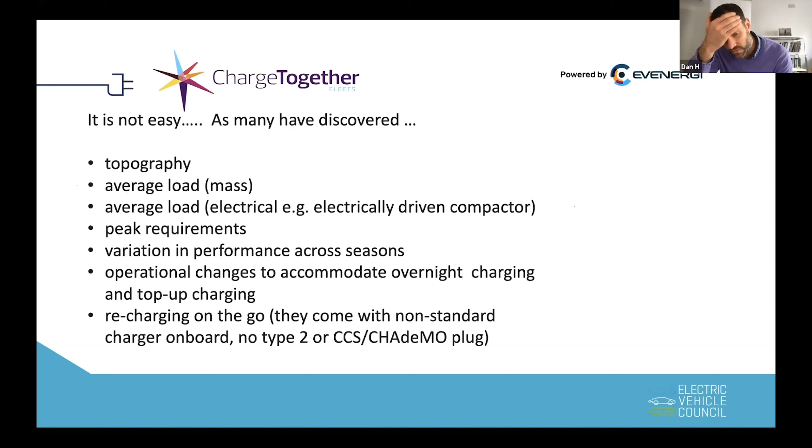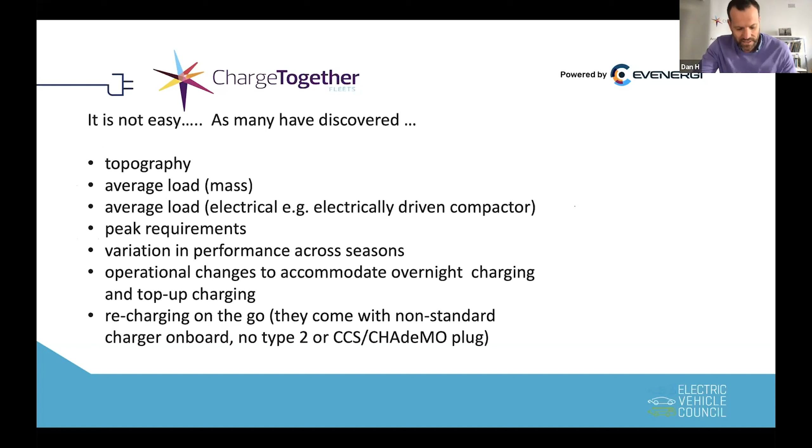It's not easy. There's lots of things to think about: topography, load, peak requirements, and operational changes with overnight charging and having to recharge on the go. There's still things that need to be solved. It's quite complex, but it's really pretty close, and in many cases it's actually there. And certainly it's very, very close in the long term.

So what it will require, and I guess this is the ChargeTogether plug, is a lot of collaboration. So the focus for people on the line who are transport leaders or suppliers is working together to drive forward procurement, to give people like SEA Electric a lot of forward visibility, and obviously the role of the EVC, which is really focused on government policy support and grants.

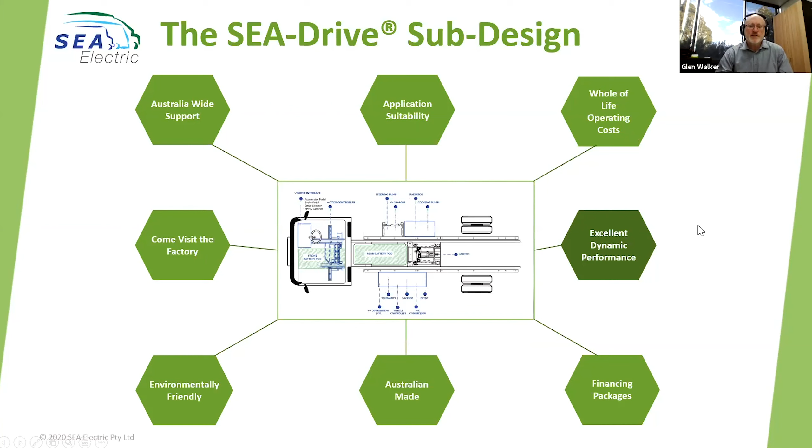The vehicles perform in their selected application very well, and the whole of life operating costs are actually quite competitive. To drive one is quite a surprise. The instant surge of acceleration and no noise is probably the most profound experience, and you hear the wind going past the mirrors, and you hear every little squeak that the vehicle has.

Ideal application is somewhere between 150 and 250 kilometres a day - one that starts at a base, either starts full and returns empty, or starts empty, picks up along the way and returns full. Two obvious applications: an empty start is a rubbish bin collector, a refuse vehicle, picking up SULO bins along the way, starting empty and returning back to base full; or, in this case, a little delivery van, which starts full and returns to base empty.

Approximately 500,000 of these types of vehicles are registered in Australia, and about 60% of them do less than 200 kilometres per day. Most of those vehicles reside in a capital city. Australia's population is very centralised in capital cities, as we all know.

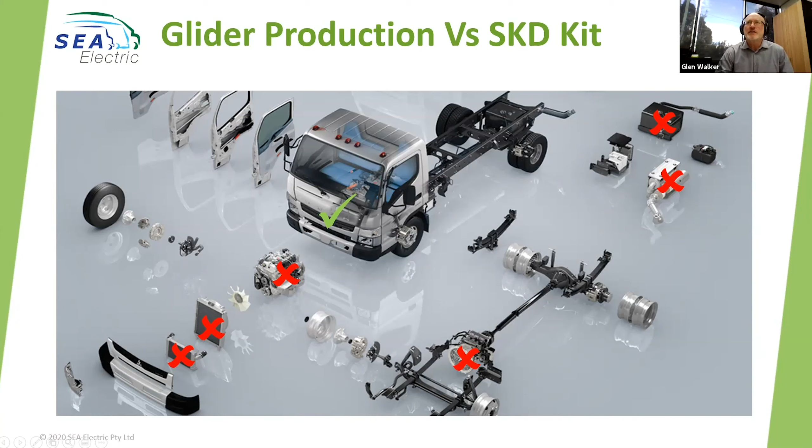Vehicle total cost of ownership. Almost without exception, our vehicles pay themselves off or pay back the original premium in years 4 to 5. And it's primarily off the back of the significant savings our vehicles have in electricity versus diesel. Very expensive diesel compared to less expensive electricity.

So, as I said before, with a glider, you've got the cost of removing these things. You've got a specialised roll-on, roll-off ship. There's waste associated with that, and our service and support coming out of Melbourne. What we found in a COVID-19 world, travel restrictions and so on, it's made it increasingly difficult to have a national footprint coming mostly out of one geographic location. And it's even challenged our supply lines significantly as well.

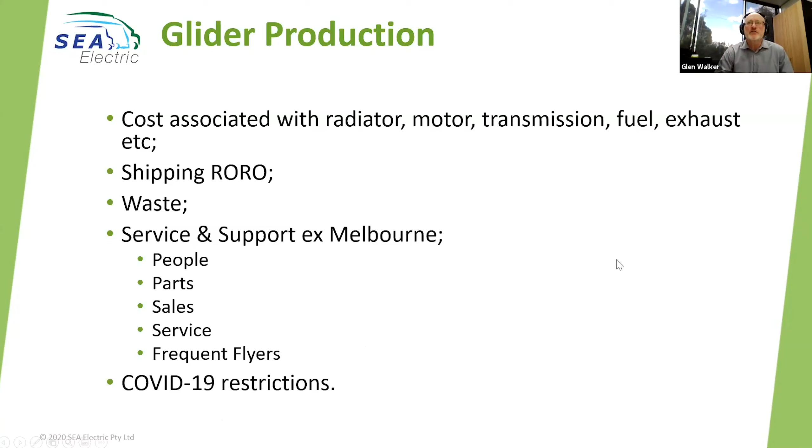So one of the ways we've responded, and this has been a long time in the making, is we have a truly globally significant collaboration between SEA Electric and Hino Motors Australia, where we will be importing semi-knocked down kits, so effectively trucks in a box, assembling them in our facility, obviously with an electric power system, and then retailing them through a select group of national Hino dealers. And here they are.

So 2 in Queensland, 2 in Sydney, 1 in Newcastle, 1 in Canberra, 1 at the border, 2 in Melbourne, 1 dealership with 3 locations in Tasmania, also Adelaide and Perth. So one of the key issues we faced in a COVID-19 world will be addressed. One of the key issues about complexity of purchasing will also be addressed under this arrangement. So we're really very, very excited about it.

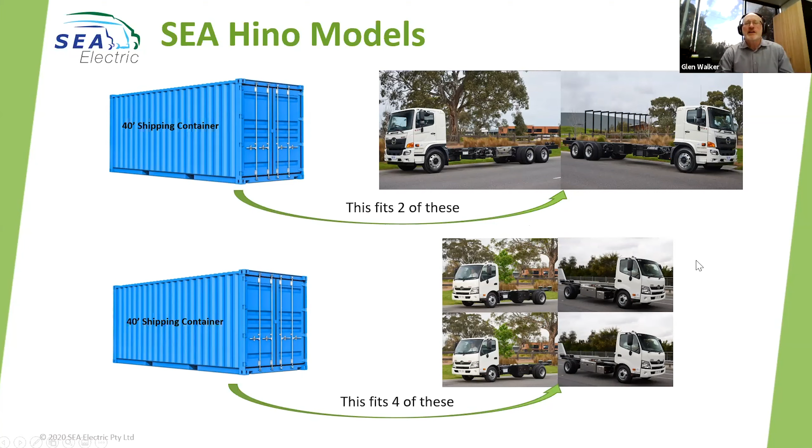So we can fit 2 of these in 1 of these, and we can fit 4 of these in 1 of these. And the shipping alternatives for containers versus roll-on, roll-off are significantly easier to find as well. So again, inherent costs, efficiencies, producing an integrated vehicle all comes out of this semi-knockdown kit model. So as I said, pretty excited about it.

It allows a full integration of the electric componentry, utilising local suppliers who in fact used to service the Fords and Holdens and Toyotas of this world. Designed, assembled, and fully compliant in Australia. So SEA Electric is the Tier 1 compliance plate holder of these vehicles with Australia-wide sales, service and parts support. So lowering the risk is what this is all about.

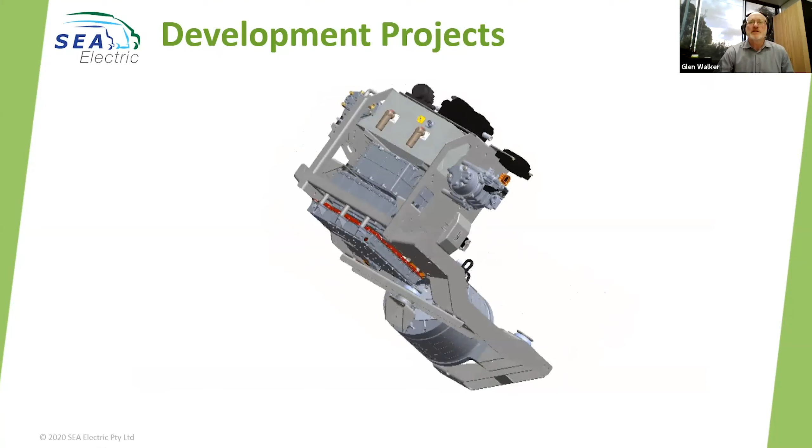This is the motor contained in its sub-chassis, and it picks up on standard mounting points inside of a van. And this configuration we're using here is highly adaptable to a number of different vehicle configurations, and I'll show you a few of them as we go to the next couple of slides, and you'll see elements of this power tower in some of these other vehicles.

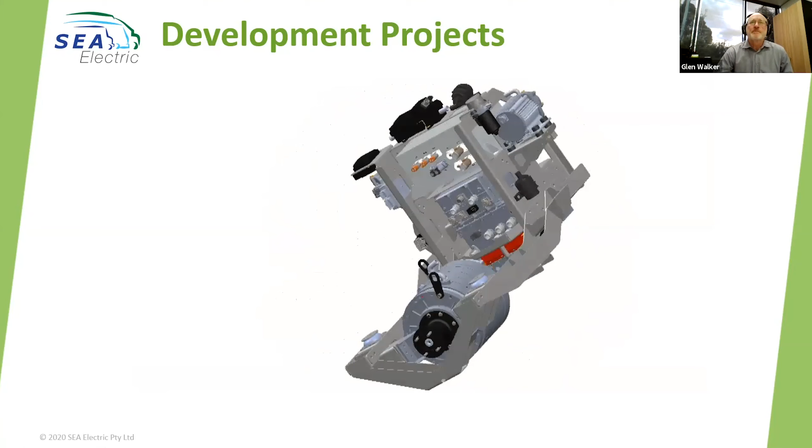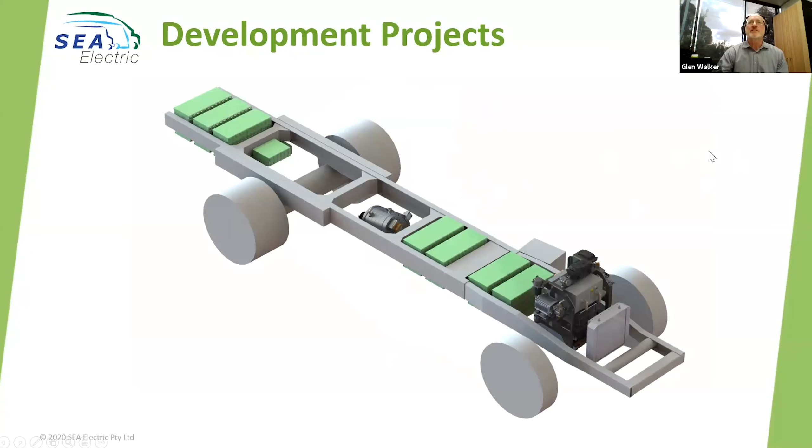So it looks very simple, but I can assure you there's a lot of intellectual capacity that's gone into that. Okay. And here's an example of that power tower in a 616 Hino chassis, which we're developing at the moment, with the battery packs and the motor. Here is that same configuration in that Mercedes-Benz Sprinter.

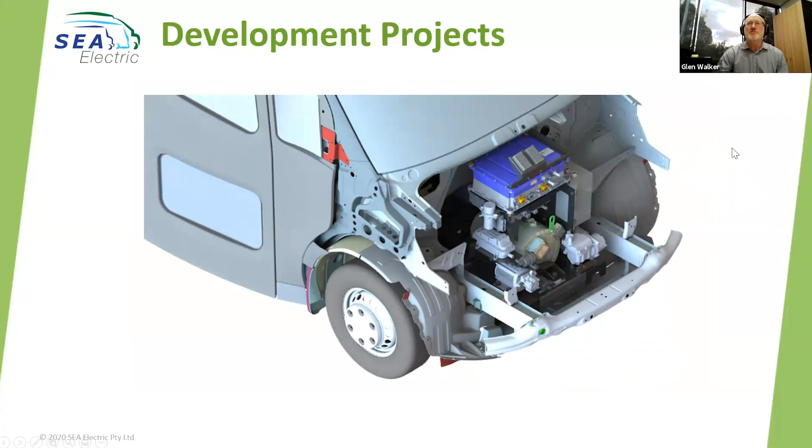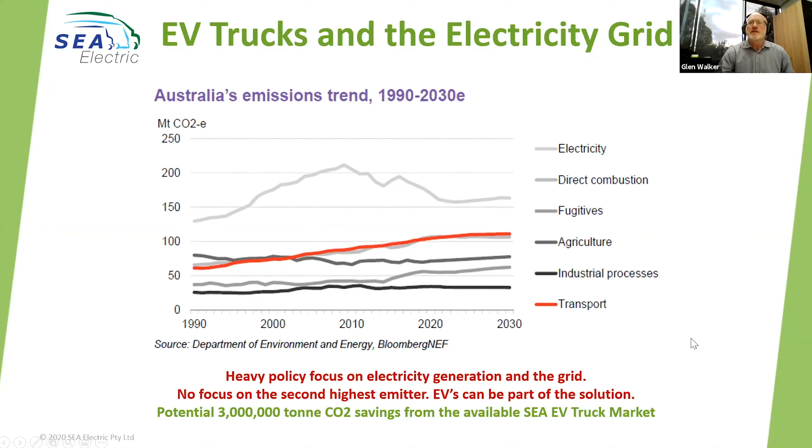And energy, CO2. Truck transport is the second highest emitter of CO2 in Australia. And yet most of the attention we have is on energy or electricity. And there's an opportunity for policymakers to focus heavily on things like transport, and for example, investment allowances and those sorts of things. It would be nice if they could encourage those investment allowances towards the uptake of some of our technology.

In these trucks, if you connect 500 of them to the grid at the same time, you have the same battery reserve as what is in South Australia's Tesla battery. And at maximum spot prices of energy, that's a significant amount of money in each vehicle. Municipalities could collectively bargain for the energy and play an active role in grid stabilisation. Hot day, lots of air conditioners, you could park your fleet and sell your energy back to the grid.

And there's a tremendous opportunity for relationships with third-party infrastructure people, energy suppliers, and indeed vertically integrating the whole lot through to your truck. And that's potentially what the future in our space may look like.